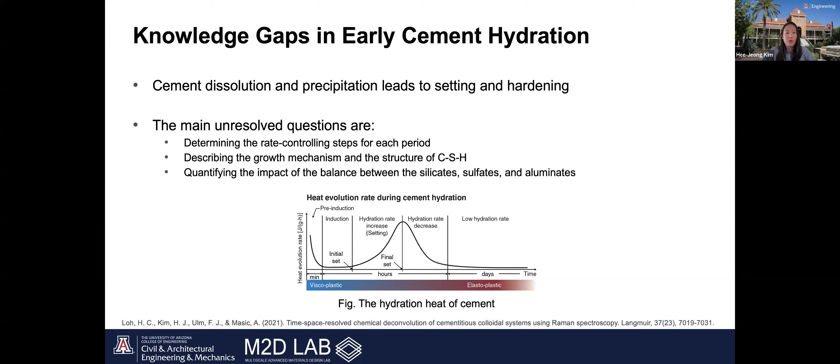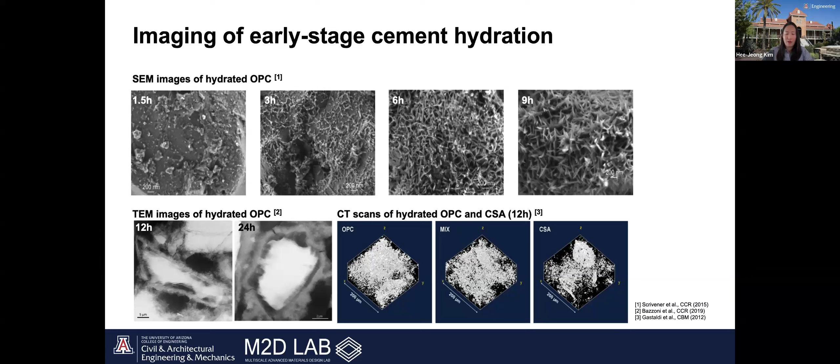So many researchers are trying to understand the early stage of cement hydration using different experimental techniques, such as SEM, TEM, and CT scans, to observe how the material changes over time. These techniques help us see the formation of hydration products and understand how cement hardens in the early cement hydration stages.

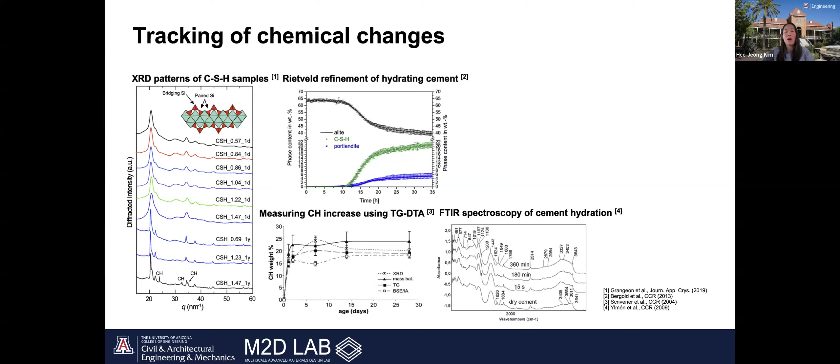To track the chemical changes that happen during early stage cement hydration, researchers also use techniques such as XRD, TG-DTA, and FTIR. These methods help us identify the chemical reactions, monitor phase changes, and understand how hydration products develop over time.

However, most of these analysis methods are invasive, and the samples can be damaged during preparation steps such as crushing, heating, or vacuuming. However, Raman spectroscopy is a non-invasive method that can overcome these disadvantages. It allows us to analyze chemical and structural changes in cement without damaging the sample, making it a powerful tool for studying early stage hydration.

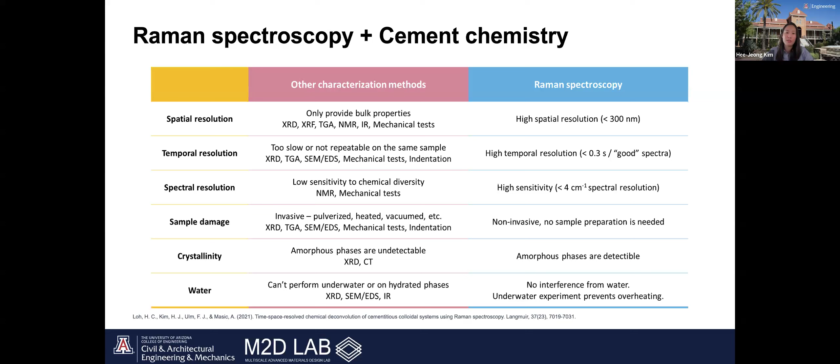Therefore, Raman spectroscopy is ideal for tracking the early stages of cement phase transformation. In this study, I used Raman spectroscopy to observe the cement hydration process, both spatially and temporally. This method allows us to identify the hydration products as they form and evolve. The goal of the study is to understand the dynamics of the early stage cement hydration process and to gain insight into the structure and formation of CSH, which is the main strength giving phase in cement.

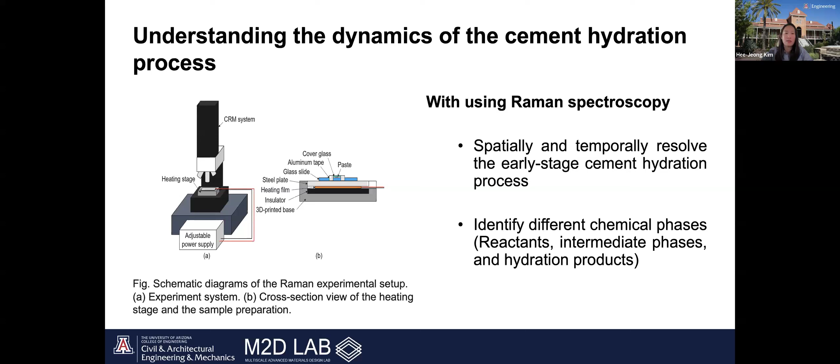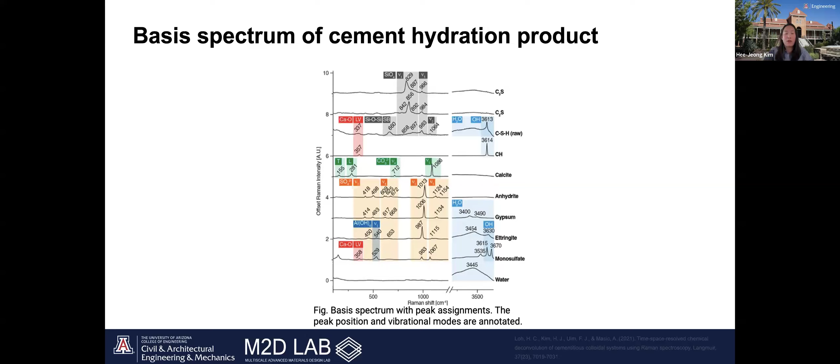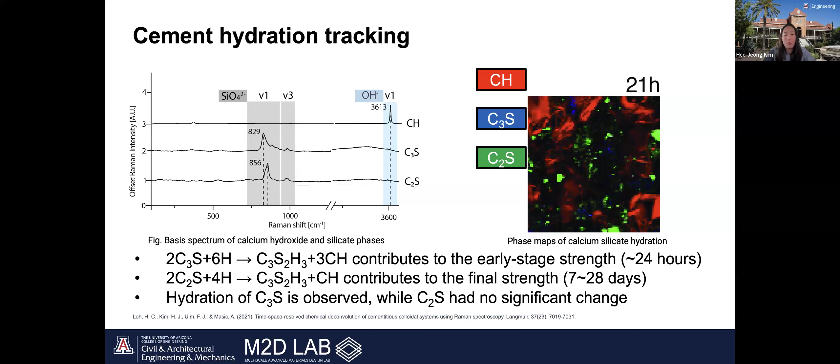So one of the main advantages of Raman spectroscopy is its ability to identify different hydrated phases in cement, such as CSH, gypsum, ettringite, monosulfate, and water. The OH symmetric stretching peaks appear in the range of 3,000 to 3,700 per centimeter, and they can be categorized into four different types: free water, bound water, CaOH, and SiOH. So in this study, we focused on the OH symmetric stretching peaks, particularly the CaOH containing phases, to better understand the hydration reaction and the formation of CSH during the early stages of cement hydration.

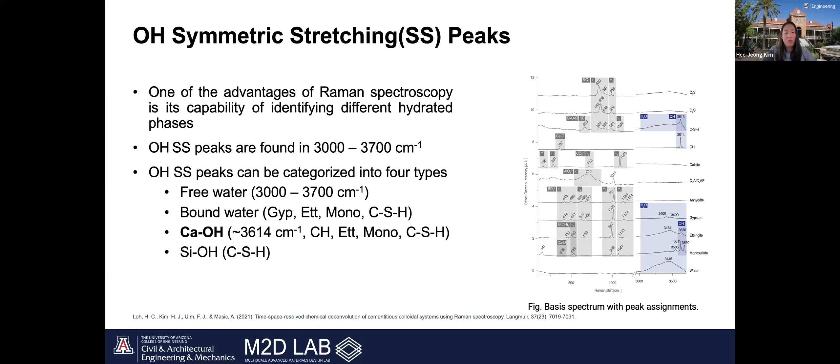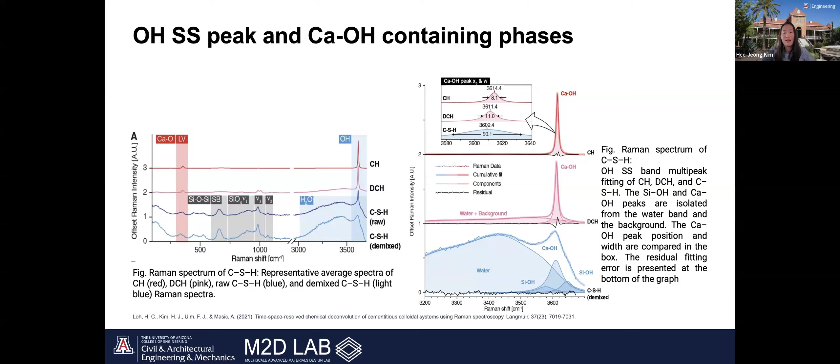OH bonds can be found in many different components of cementitious materials. Here are the OH profiles of calcium hydroxide and disordered calcium hydroxide, and lastly CSH, calcium silicate hydrate, are compared. Both CH and CSH contain OH bonds, but their Raman peak position and peak width are different, reflecting their unique chemical environments. By decomposing the peak profiles, we can identify the local environments of the OH bonds and gain insights into the structural differences between these hydrated phases.

This slide shows an animated plot of the CaOH peak position and width. By tracking these values over time, we can clearly see how the CaOH peak changes during the early hydration process. From this analysis, we discovered a new phase, an amorphous or disordered form of calcium hydroxide, which we call disordered calcium hydroxide, DCH. We found that this disordered CH acts as a precursor to crystalline calcium hydroxide, forming before the setting process begins.

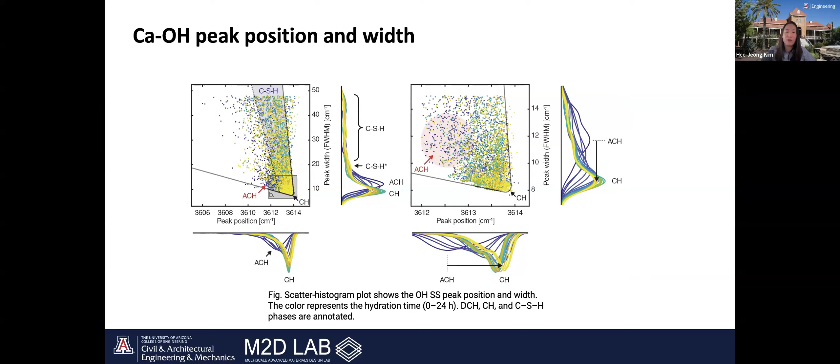This discovery gives us new insight into the early hydration mechanism and helps explain the formation pathway of calcium hydroxide in cement.

From the CSH spectrum, there are three types of OH bonds that can be identified: bound water, CaOH, and SiOH. Based on this observation, we can infer that CSH exhibits a broad bound water peak and an OH peak slightly wider than that of CH, with a right-hand shoulder, suggesting structural complexity. There are numerous structure models for CSH that have been proposed, and our Raman spectrum strongly supports Gartner's model, which describes CSH as a disordered layered structure containing both CaOH and SiOH bonds.

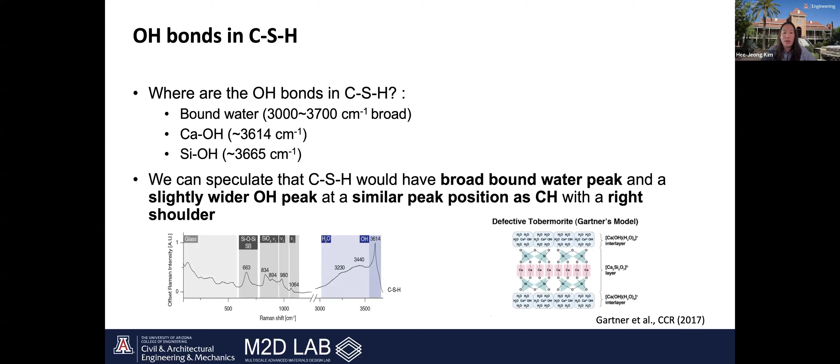Raman spectroscopy can be used not only to study OH phases, but also to differentiate the various sulfate phases in cement. The Raman mapping image shows that a large amount of ettringite is already formed within just 17 hours of hydration. It helps densify the cement matrix structure, contributing to early strength development and stability of the material. This Raman technique can be applied to various types of cement research, as demonstrated in the following studies.

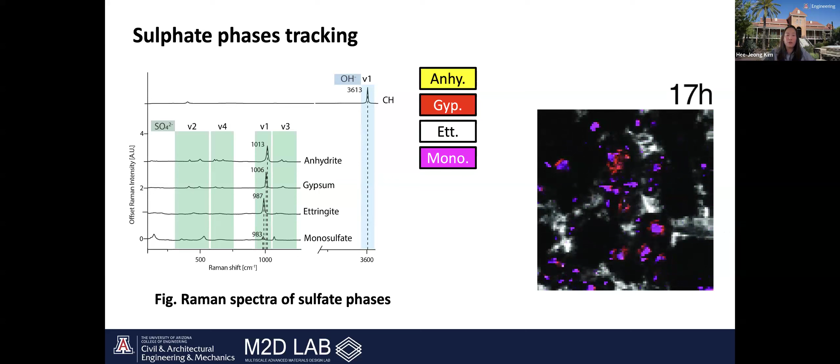The first study is on the activation and reactivity of mine tailings in cementitious cement systems. As you know, a big problem with concrete is the carbon emissions from cement production. Since concrete is the most used material in the world, this has a huge environmental impact. Cement production releases a lot of CO2 because it needs high temperatures and chemical reactions that produce carbon dioxide, making it responsible for about 7 to 8% of global CO2 emissions.

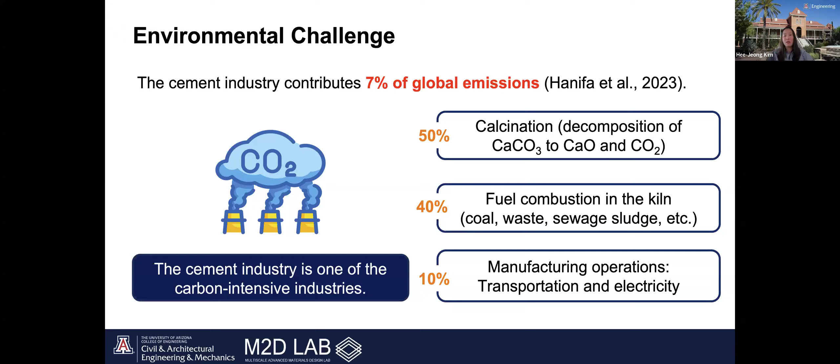To solve this problem, researchers are trying to develop alternative cements and reduce the carbon footprint of concrete. One good way to do this is to use supplementary cementitious materials, or SCMs, as much as possible. These materials can partly replace Portland cement and help lower emissions while still keeping good performance.

In the mining industry, one of the biggest challenges is the accumulation of tailings. Every year, billions of tons of tailings are generated and stored, yet most of them have no practical use. These tailings can cause serious environmental and health problems, such as acid leaching and contamination of soil and water systems. They can also become part of the ecosystem, creating a long-term risk for surrounding communities. In addition, managing and storing this waste is very expensive, requiring large areas of land and continuous monitoring.

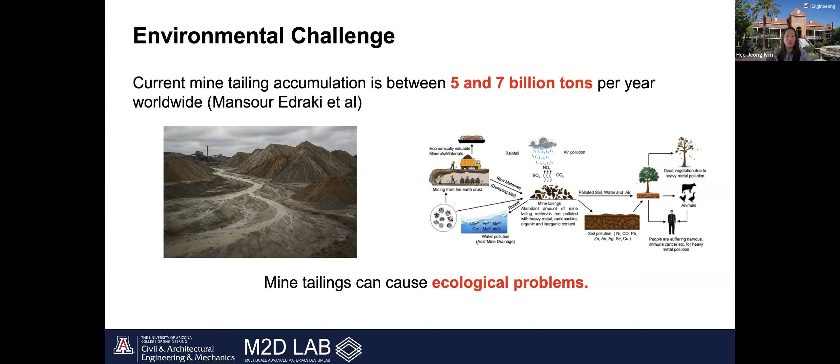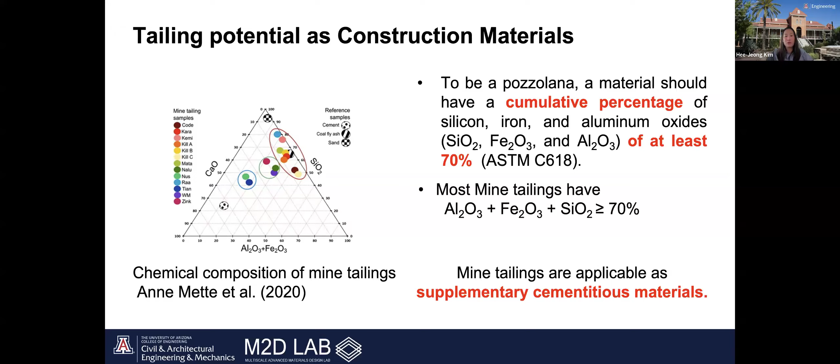If we look at the chemistry of mine tailings, most of them contain a lot of silicon, iron, and aluminum oxides, and some also have calcium oxide. This composition is very important for making cement. According to ASTM C618, pozzolanic material should have at least 70% of silicon, iron, and aluminum oxide combined, and most mine tailings already meet these requirements. This means that tailings have good potential to be used as supplementary cementitious materials, or SCMs.

Based on their potential, mine tailings can be used in many different ways in construction materials. Tailings with a high amount of silicon oxide can be used as a precursor for geopolymers, and they can also serve as supplementary cementitious materials, partially replacing cement materials. Some tailings can be added to the clinker kiln during cement production, and depending on their particle size, they can be used as fine aggregate or coarse aggregate in construction. Tailings offer many possibilities to replace natural resources and reduce environmental impact in the construction industry.

In general, crystalline materials have particles arranged in a regular and stable pattern. Because of this structure, they are usually less reactive, and most minerals in mine tailings are crystalline, which means they do not easily react in cementitious systems.

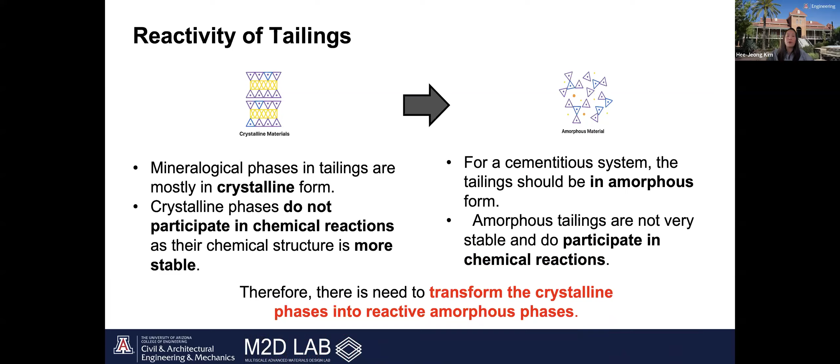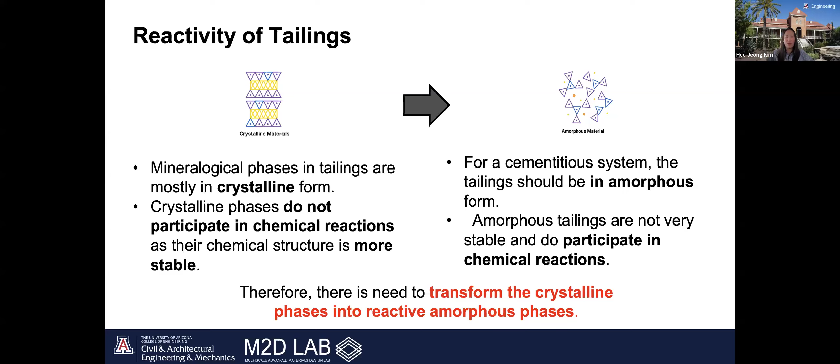However, to make tailings reactive in cementitious systems, they need to be amorphous, where the atoms are not arranged in a regular pattern. Amorphous materials are less stable and can react well in an alkaline environment. So if we want tailings to participate in the cement hydration reaction, we need to convert their crystalline phases into amorphous ones.

Therefore, our first research focuses on the activation and characterization of mine tailings to improve their reactivity. The main idea is simple: we need to add more energy to the material to break the crystal bonds, make it amorphous, or help it rearrange into a more reactive phase.

There are three main activation methods. The first is mechanical activation, which breaks particles, increases surface area, and creates structure defects that make the material more reactive. The second is thermal activation, which uses heat to change stable crystalline phases into amorphous ones. Under the right conditions, it can also form new and highly reactive phases.

The last one is chemical activation, which uses alkaline or acidic solutions to dissolve minerals and create new reactive binding gels. In our research, we mainly focused on using mechanical and thermal activation methods to study how tailings can become more reactive in cementitious systems.

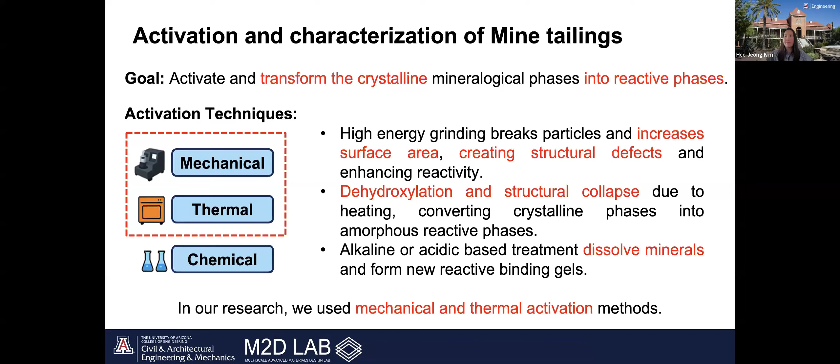In this study, we used gold mine tailings, or GMT. The analysis of GMT shows that it contains several crystalline phases, including quartz and calcite, which are important for cementitious binders. It also includes clay minerals such as orthoclase and muscovite, which are mainly silica and aluminosilicate-based materials.

In addition to these, GMT also contains pyrite and sulfate-bearing phases. These are problematic because pyrite can oxidize and produce acid mine drainage, which is harmful to the environment. And if not treated properly, it can also cause sulfate attack when used in cement-based materials.

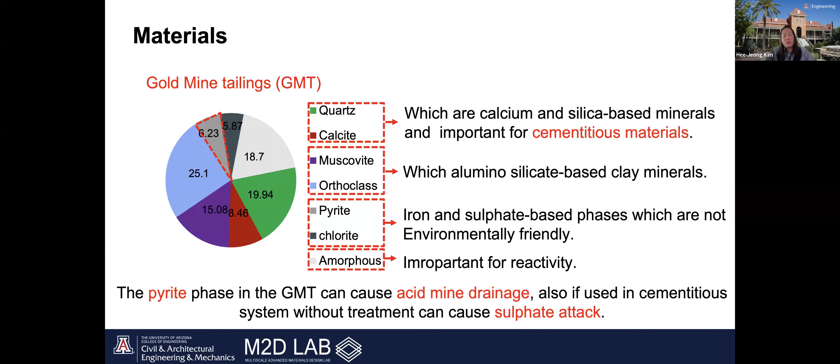After the characterization, about 18.7% of the material is amorphous, which is the reactive portion that can contribute to cement hydration. So we were able to confirm that amorphous phases are about 18.7% in our gold mine tailing samples.

For activation, we used mechanical and thermal methods to increase the energy and break the crystalline bonds, making the tailings more reactive. For mechanical activation, the raw tailings were ground for 16 minutes in a disc mill running at 500 RPM.

For the thermal activation, after grinding, the samples were heated at 800, 1000, and 1200 Celsius degrees. After heating, they were rapidly cooled, or quenched, to prevent the crystals from forming again.

All activated samples were analyzed using XRD and Raman spectroscopy, and we performed quantitative phase analysis with Rietveld refinement, and each refinement showed a goodness of fit below 1.5, which means the result is very reliable.

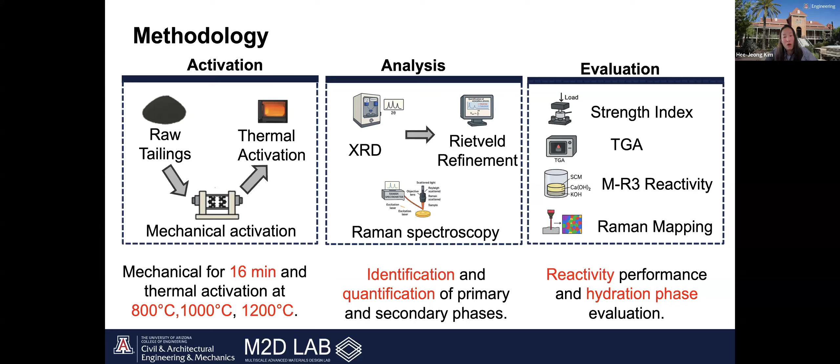Since our goal is to use these tailings in cementitious materials, we tested their reactivity using compressive strength tests, TG-DTA with bound water analysis, and Raman spectroscopy. Finally, Raman mapping was used to identify the reaction products and confirm how reactive the material became.

After the activation, we first looked at the XRD results to see how the phases changed. After mechanical activation, there was no significant change - as you can see, the material stayed mostly crystalline.

However, at 800 Celsius degrees, with thermal activation applied, we saw major changes. Pyrite and chlorite broke down completely, producing new phases like hematite and anhydrite. This shows the start of higher reactivity.

At 1000 Celsius degrees, orthoclase changed into sanidine, meaning the structure was rearranged by heat. At 1200 Celsius degrees, most crystalline peaks disappeared, meaning the material became mostly amorphous and more reactive.

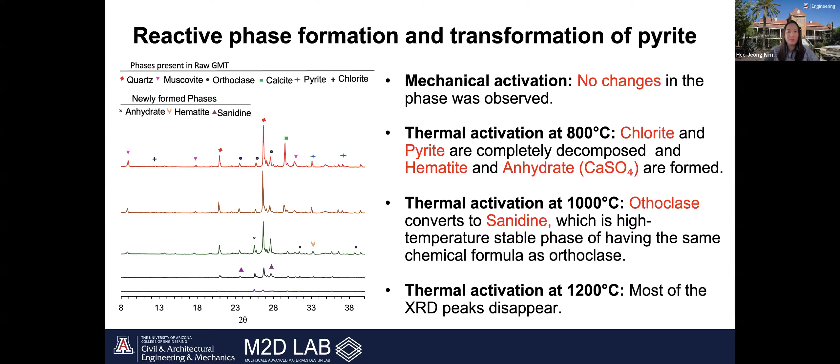We were also able to compare their chemical phases with Raman spectroscopy. As I mentioned before, Raman spectroscopy helps us identify each mineral by its unique vibrational fingerprint, allowing us to see where different phases are located in the sample through Raman mapping.

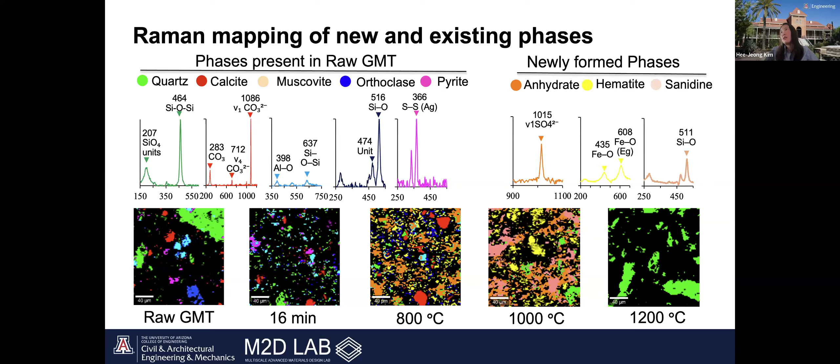In this study, we used Raman spectroscopy to confirm the formation of new phases and to check which original phases remained after the activation. The phase distribution map clearly shows the presence and spatial distribution of these new and existing phases, such as anhydrite, hematite, and sanidine.

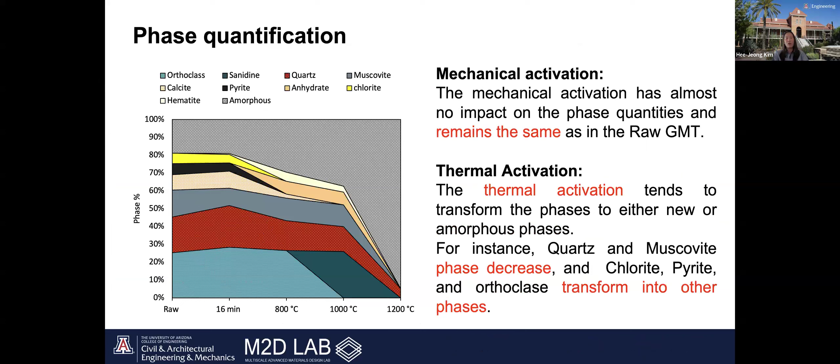So it is important to know how much of each phase is present before and after the activation, because this can be related to their activity. And to measure this, we use the Rietveld refinement for phase quantification.

At 800 Celsius degree, we saw major changes. Pyrite and chlorite completely decomposed and formed hematite and anhydrite. At the same time, calcite dropped from 8.46% to 2.29% due to decarbonation. The amorphous content also increased to about 29%, marking the beginning of higher reactivity.

As the temperature increased further, the amorphous content rose from 19% in the raw material to almost 95% at 1200 Celsius degree. This shows the higher temperature breaks down crystalline phases and creates highly reactive amorphous material.

The easiest way to evaluate reactivity is by looking at the compressive strength with the strength activity index. According to ASTM C618 standards, a material is considered pozzolan if at 20% replacement of OPC, it reaches at least 75% of the strength of ordinary Portland cement. So it means if it reaches 75%, that means the SAI, which is the strength activity index, is 100%.

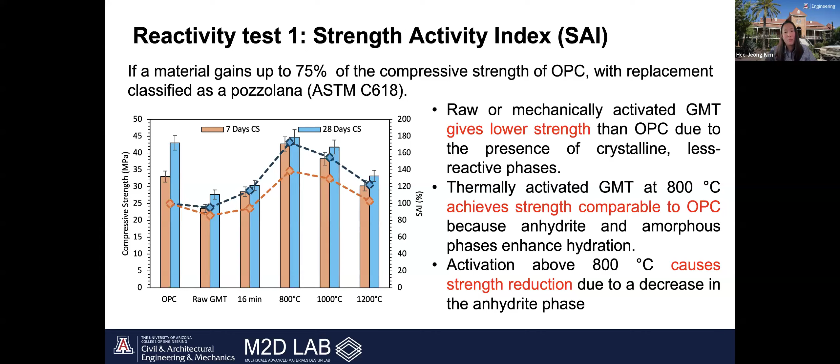At higher temperatures, such as 1000 Celsius degree and 1200 Celsius degree, the strength starts to decrease again. This drop is related to the loss of anhydrite and changes in phase composition. So overall, the thermally activated GMT at 800 Celsius shows the best performance, achieving more than 100% SAI.

Now that we have achieved a higher strength, we wanted to know whether the tailings actually reacted or just acted as a filler. One way to check this is by measuring the chemically bound water, which shows the degree of hydration. The chemically bound water becomes part of the crystal or gel network of the hydration product, like C-S-H or CASH and C-S-H.

When the sample is heated, the OH group in these structures is released, causing weight loss, and that weight loss tells us how much water was chemically bound. We follow Method B of ASTM C1897 standards. The result shows that the 800 Celsius degree activated sample has the highest amount of bound water, which matches well with the compressive strength results.

This confirms that the thermal activation at 800 Celsius not only improved the strength, but also enhanced the reactivity and the hydration of the tailings.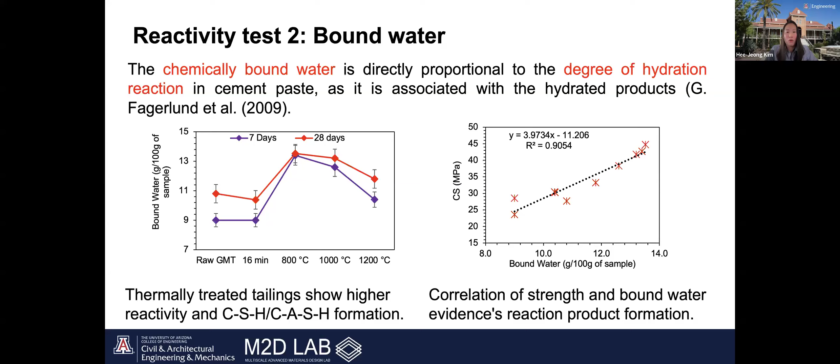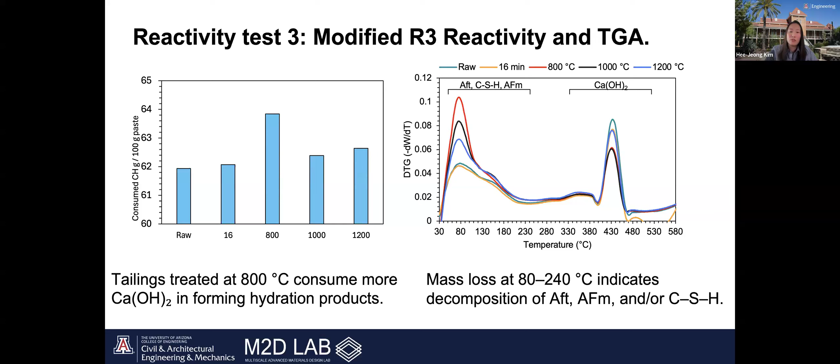To find out which hydration product among ettringite, monosulfate, or C-S-H formed in larger amounts, we used Raman spectroscopy on the R3 reactivity sample activated at 800 Celsius degree, which showed the best performance.

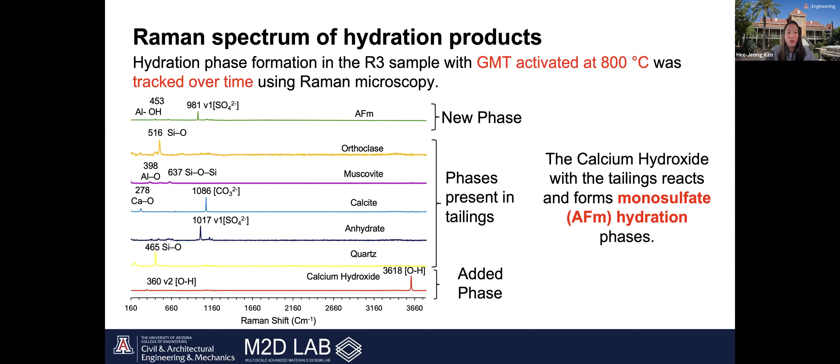After just an hour, the Raman spectra, shown in the figure, revealed the formation of the AFm phase, especially Ca4Al2(OH)12X·H2O. These spectra were used to track and analyze how the hydration product evolved over time, helping us understand the reaction mechanism of the activated tailings.

In the modified R3 test, calcium hydroxide was mixed with the supplementary cementitious materials and cured at 50 Celsius degree for 10 days. The Raman spectra collected over time were used to observe these changes.

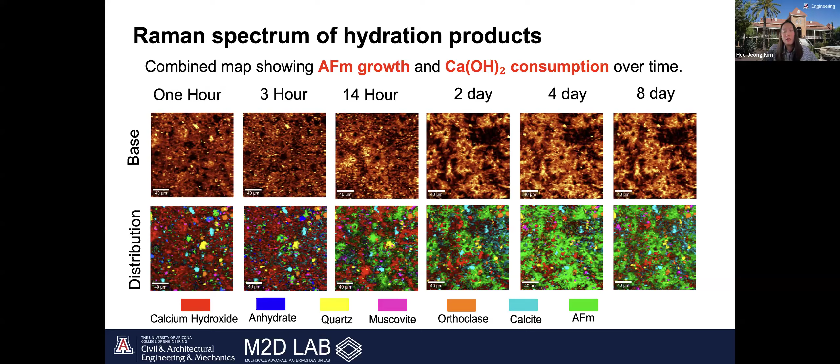On the slide, you can see the raw basis spectrum and the distribution taken after an hour. The raw distribution map shows that the AFm phase keeps growing over time, and this confirms that the main hydration product formed during the reaction is the AFm phase.

The key findings show that optimal thermal activation plays a crucial role in improving the reactivity of mine tailings, and that this happens by increasing the amorphous content and forming reactive anhydrous phases. At the optimum activation temperature, anhydrate and other reactive phases are formed, while pyrite and other unwanted minerals are completely decomposed. These changes lead to better performance of the material in cementitious systems.

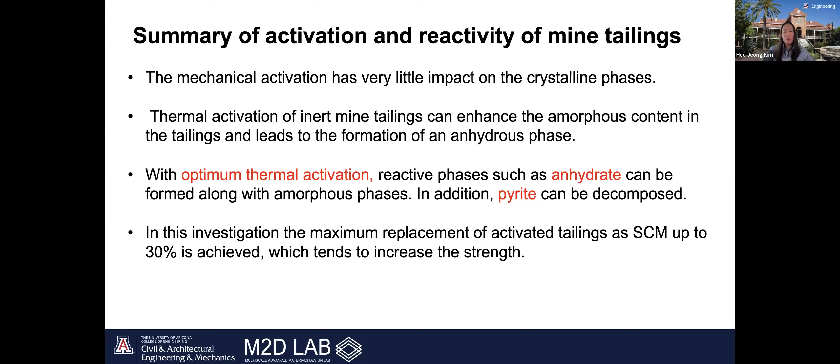We also found that up to 30% of cement can be replaced with activated tailings without losing their strength. In fact, the strength improves, and this approach supports the sustainable use of mining waste in construction materials.

The second study focuses on the machine learning guided reuse of copper mine tailings. Machine learning is important because it allows us to make data-driven decisions to optimize activation conditions and mix design. This helps us deal with one of the biggest challenges in using mine tailings, their compositional variability, and by applying machine learning, we can predict material performance, reduce trial and error experiments, and save both time and resources.

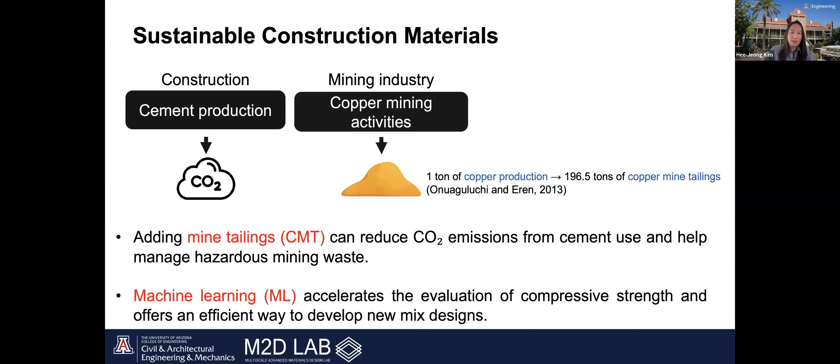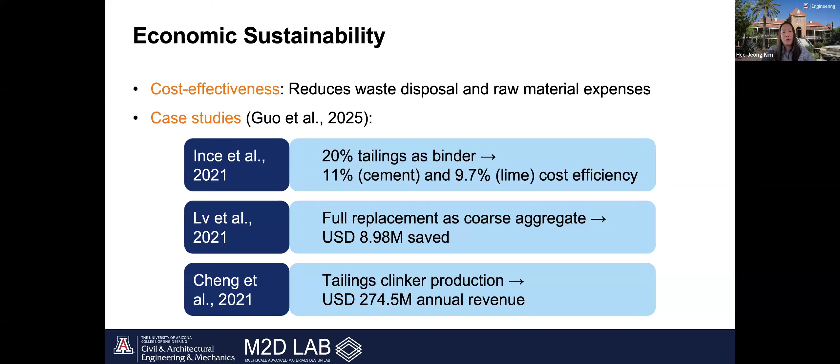Since we both know the construction and mining industry face serious environmental problems, we applied machine learning to efficiently optimize the mix design and target strength, thereby accelerating the development of sustainable construction materials. The economic sustainability of using mine tailings is supported by many case studies that show significant cost savings and new revenue opportunities. In this study, we carried out two separate experiments using copper mine tailings to develop sustainable mixed designs.

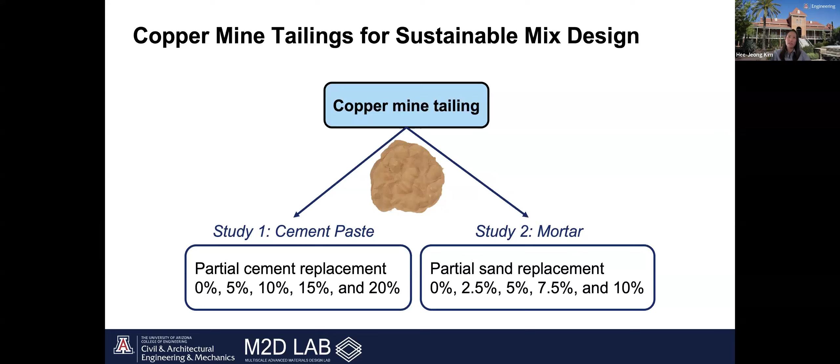In the first experiment, we used the copper mine tailings as a partial cement replacement in cement paste, and in this case cement was replaced from 0% up to 20%. In the second, we used the copper tailings as a partial aggregate replacement in mortar, and here sand was replaced from 0% up to 10%. These two approaches help us understand how tailings affect the performance of different construction materials and how we can optimize their use both for sustainability and strength development.

To train our machine learning model, we needed a dataset that included both mix design information and compressive strength results. Because data on materials containing copper mine tailings is still limited, we used the public database of concrete materials, even though it does not include tailings. That database contains 1,030 data points.

For study one, where copper mine tailings were used as a partial cement replacement, we created our own 31 data points with the experiment. For study two, where tailings replaced sand, we generated 15 data points with the experiment.

We focused more on study one because we wanted to test how machine learning predicts compressive strength with different CMT, like copper mining tailings contents, and water to cement, water to binder ratios, and curing times. Study two included fewer variations.

After combining our experimental data with the public data, the total dataset included 1,061 data points for study 1 and 1,045 data points for study 2.

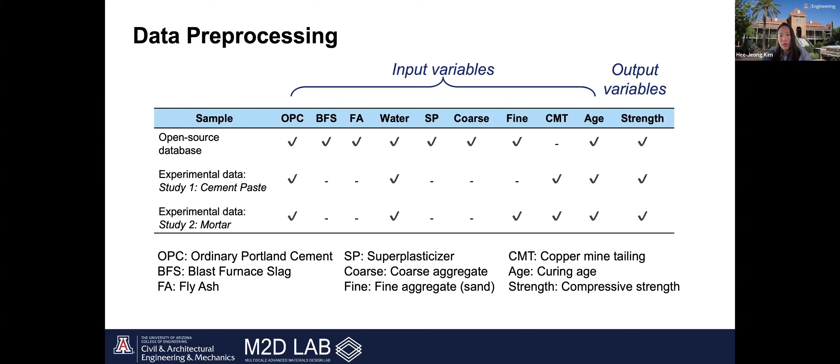Since we combined the open source data with our experimental data, the input parameters now include cement, slag, fly ash, water, plasticizer, coarse aggregate, sand, copper mine tailings, and curing age. When a variable was not available in either dataset, we simply assigned it a value of 0. For example, in study 1, we set zeros in the CMT column for the open source data. In contrast, for our experimental data, we assigned zeros to the BFS, fly ash, superplasticizer, coarse, and fine aggregate columns.

In machine learning, we always need training data to build a model and testing data to check its performance. A common rule is to use 80% of data for training and 20% for testing. In study 1, this rule was applied only during hyperparameter optimization. Hyperparameters are adjustable settings that help us improve the model's accuracy, and optimization helps find the best combination of these values.

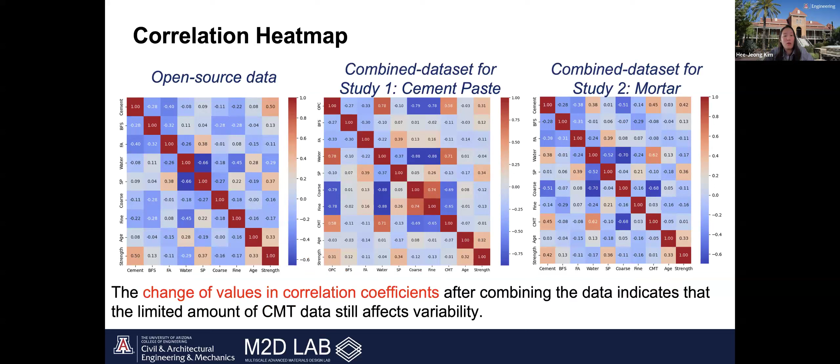In study 2, we applied the 80 to 20 split for the entire prediction process, from training to testing. And to check whether our small experimental data set could be combined with the open source data to build reliable machine learning models, we look at the correlation coefficients between variables, and the combined data set provides a different and more representative data distribution, which is important for modeling materials containing copper mine tailings.

For study 1, we used 3 machine learning models, and among them, the random forest model went through hyperparameter optimization, where we tested 5 key parameters and found the best values using Bayesian optimization. For study 2, we used 10 different machine learning models based on literature to explore which one performed best for this type of data. In this case, we did not optimize the parameters. We used each model with its default setting to compare their baseline performance.

All modeling and analysis were done using Python's machine learning package, scikit-learn.

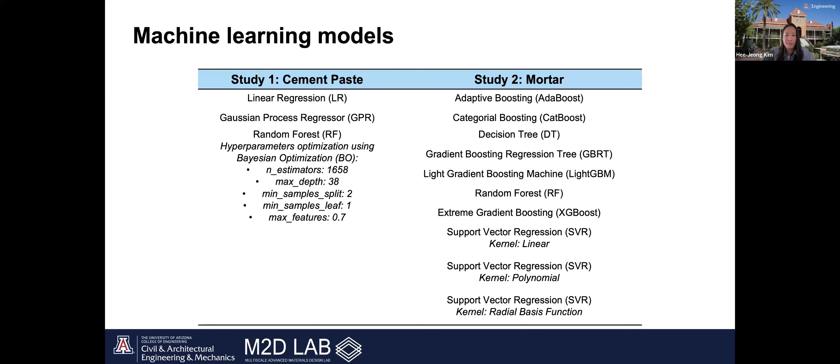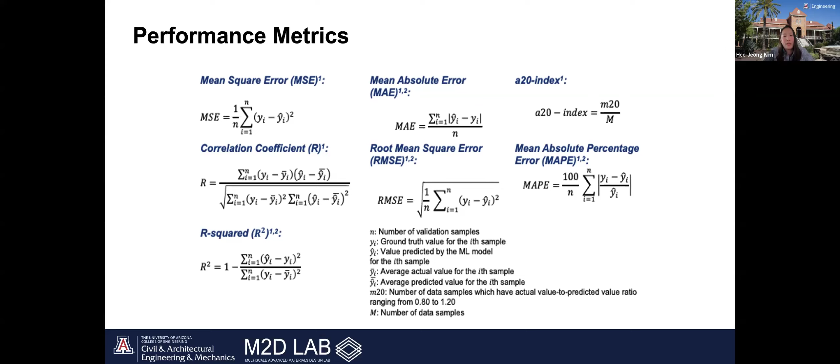To evaluate how well each machine learning model performed, we used several performance metrics, and the numbers are shown on the slide indicating which study used each metric. For example, R2 score was used in both study 1 and study 2 to measure how accurately the model predicts the compressive strength. These metrics help us compare model performance and determine which algorithm works best for predicting the behavior of materials with copper mine tailings.

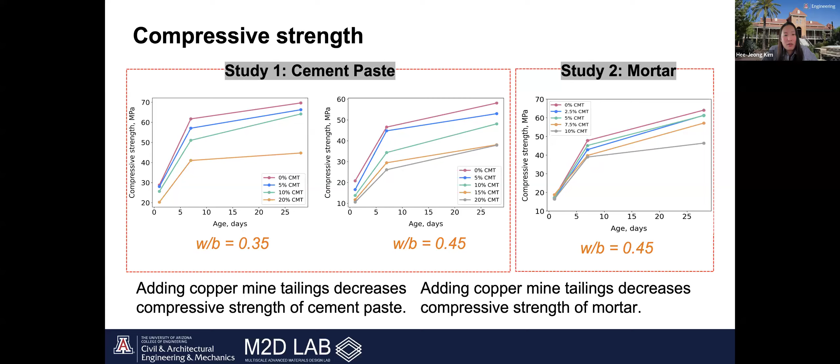However, the cement paste with CMT never reaches a higher compressive strength than the control mix without CMT. Even so, all specimens at 28 days still meet the minimum strength requirement for structural walls, which is 20.68 megapascal, or 3000 psi.

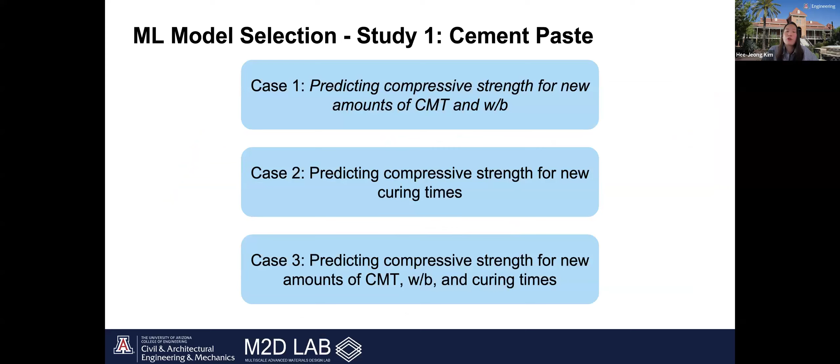However, when we introduced new curing ages, or combinations of new CMT amounts, water to binder ratios, and curing ages, the models were less accurate. They could not predict compressive strength as reliably in those cases. Among all the models, the random forest model with Bayesian hyperparameter optimization performed the best overall in case number one.

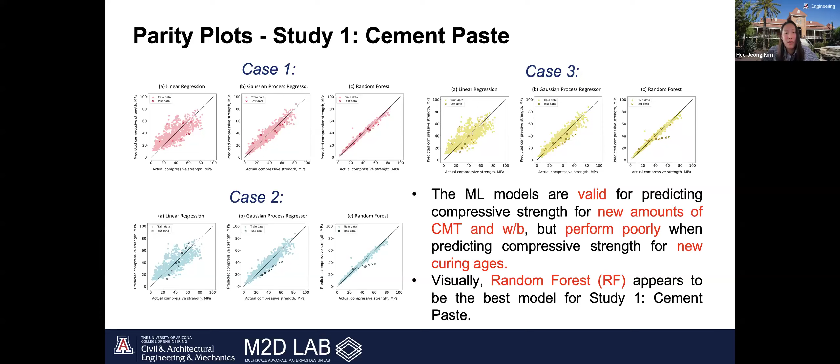To validate the parity plots, we used several performance metrics to see which machine learning model performed best. For these metrics, lower values are better for MSE, RMSE, MAE, and MAPE, while higher values are better for R, R squared, and the A20 index.

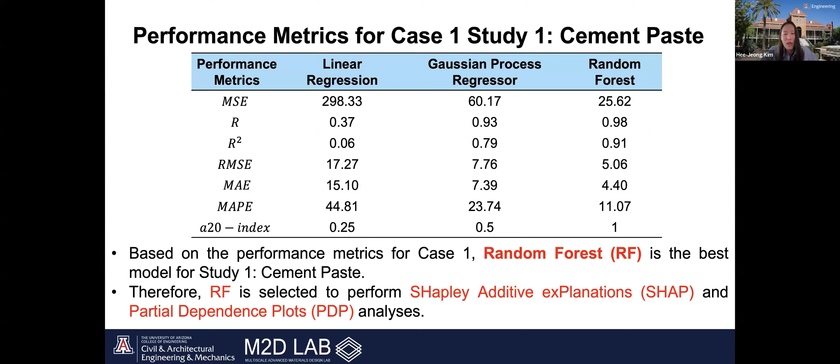Based on this research, the random forest model was confirmed as the best performing model, and we then used the random forest model for further analysis, including Shapley additive explanation and partial dependence plots, which is PDP, to better understand how each variable affects the compressive strength.

The random forest model trained using our case one data, which predicts the compressive strength of cement paste with a new amount of copper mine tailings and water binder ratio, was used to generate a predictive compressive strength curve over curing age. In the graph, the points represent the experimental data, which is the actual values, and the line represents the model's predictions.

The results confirm that our machine learning model can accurately predict compressive strength for new CMT contents and water to binder ratios, but it doesn't perform as well when predicting new curing ages. We also expected the compressive strength to continue increasing after 28 days, but the predicted curve shows a plateau, meaning the model assumes the strength stays almost constant after 28 days.

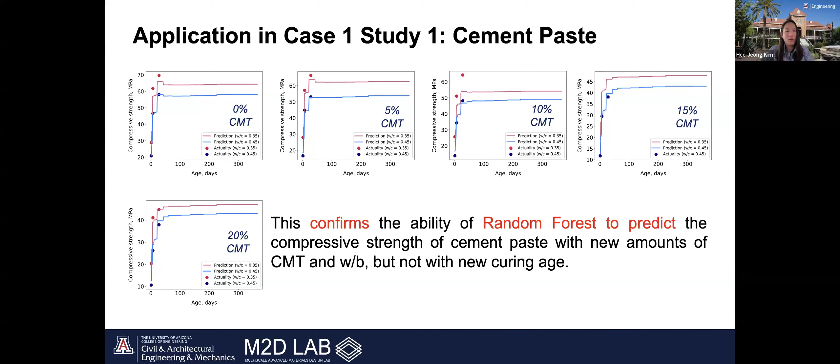From the SHAP results, we identified which factors have the greatest and least influence on compressive strength. For both study one and study two, the results show that curing age is the most influential factor, while CMT has the least influence on strength. In study 2, the effect of copper mine tailings is even smaller than in study 1, indicating that their influence on the overall strength of the mortar is limited compared to other mix design parameters.

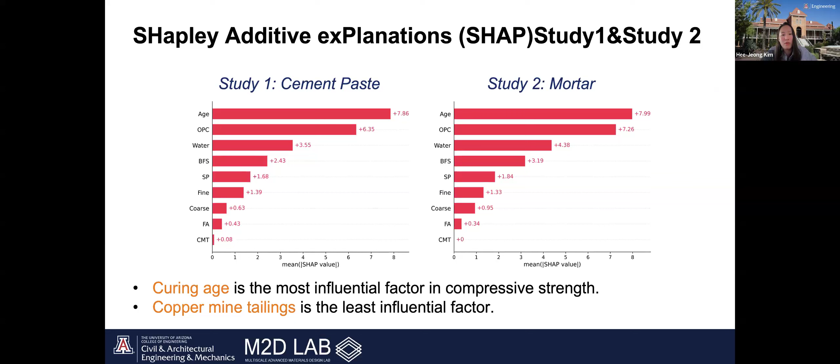To see how copper mine tailings affect compressive strength, we used PDPs. In study 1, adding up to 250 kilogram per cubic meter of copper mine tailings caused only a small decrease in compressive strength. In study 2, adding up to 80 kilogram per cubic meter of copper mine tailings reduced compressive strength by just 0.12 megapascal. These results show that we can incorporate a significant amount of copper waste to produce sustainable construction materials with a minimal loss in strength.

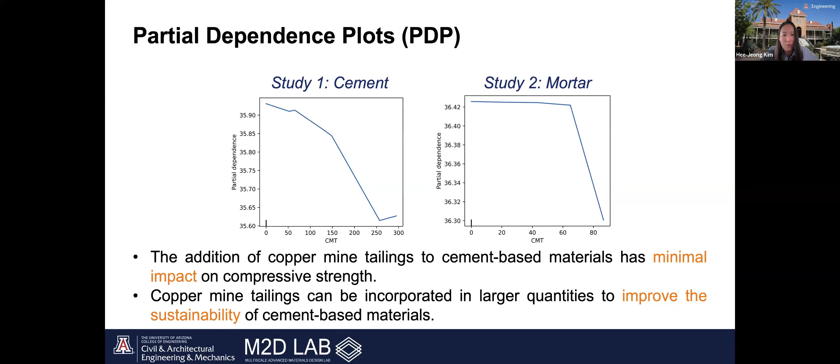To compensate for the slight reduction in compressive strength caused by tailings, blast furnace slag can be added. Our PDP results for the BFS, available in our paper, confirm this positive effect.

In study 1, where we predicted the compressive strength of the cement paste, the random forest model with Bayesian hyperparameter optimization performed the best. However, this model was most effective only for predicting new replacement levels of copper mine tailings and water-to-binder ratios, not for new curing ages.

In study number 2, which focused on mortar, CatBoost was the best machine learning model. Across both studies, curing age was the most influential factor, while copper mine tailings had the least influence on compressive strength. This means that a larger amount of copper mine tailings can be safely incorporated to create more sustainable construction materials without significantly reducing the strength.

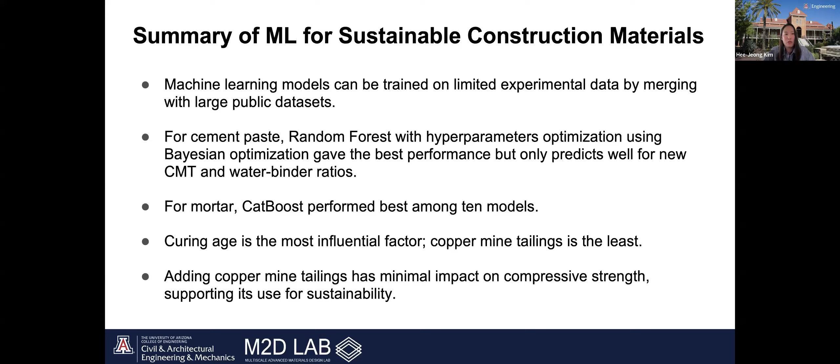Lastly, I will talk about regolith materials, an emerging field that strongly emphasizes sustainability and utilizes in-situ material for space construction. As I will discuss in the next slide, building in space is extremely challenging due to the long lead times, harsh environmental conditions, and limited availability of resources.

Any successful space construction project must be able to extract and process local materials such as regolith and find ways to remotely utilize those resources for building. This concept is known as in-situ resource utilization, or ISRU, and it plays a key role in enabling sustainable infrastructure beyond Earth.

The lunar surface is covered with fine regolith powder created over time by constant impact from meteorites or exposure to radiation. This radiation comes from both the solar wind and cosmic sources outside our solar system. In addition to radiation and impacts, the moon also experiences extreme temperature swings between day and night. These large changes can put significant stress on any materials used for construction on the surface.

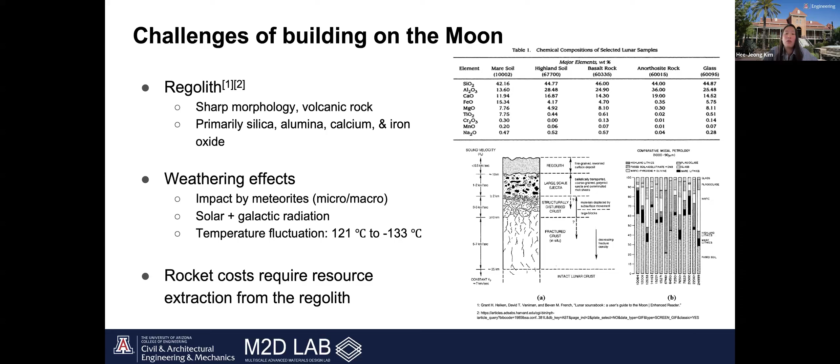In our lab, we focus on investigating the material properties of three classes of potential lunar construction materials. In the following sessions, I will discuss three studies we conducted to characterize and optimize the mix designs of these materials. The first one is fiber reinforced sulfur cements, the second one is regolith based geopolymers, and the third is baked sintered regolith powder. Each of these materials offers unique advantages and challenges for building sustainable structures on the moon.

The first study examined how particle size affects the compressive strength of the regolith simulant-based one-part geopolymer. As background, one-part geopolymer is formed by reacting a precursor powder, rich in amorphous silica and alumina, with a highly alkaline solution. The alkaline activator breaks the bond between silica and alumina tetrahedra, dissolving the powder into a paste. This paste can be cast or extruded to form a solid part.

As water evaporates, the silica and alumina organize into the amorphous gel known as NASH, or sodium aluminosilicate hydrate, and the material reaches its final strength once this gel is fully dehydrated and solidified. For lunar applications, the precursor powder would come from lunar regolith, while the sodium activator would either be brought from Earth or extracted directly from the regolith itself.

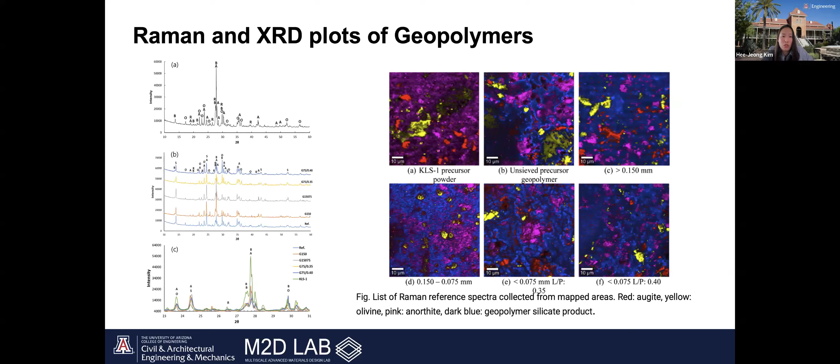The results showed that the crystalline components of the material remained mostly unchanged after the reaction. However, a new amorphous silica phase is formed when the regolith powder was exposed to the alkaline activation solution. This amorphous gel is important because it plays a key role in binding the particles together and forming the N-A-S-H gel, which directly contributes to the strength and durability of the geopolymer.

The second study focuses on developing a regolith-based sulfur cement. Sulfur cements are a promising alternative to regolith geopolymers because they don't require water, and they only need heat to form and solidify, which makes them well suited for the lunar environment.

The goal of the project is to perform mechanical testing needed to build a finite element model of a fiber-reinforced sulfur cement, and the future goal is to develop a mix design that can be used for large scale 3D printing applications on the moon.

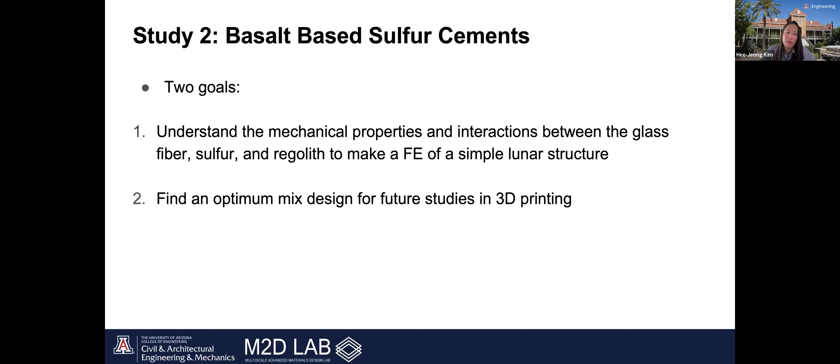In this study, we used basalt as a regolith simulant since it provides a cost effective alternative to high fidelity simulants like KLS1. Here is some background on the sulfur cements.

The basic idea is elemental sulfur is mixed with the dry regolith and then heated to about 120 Celsius degrees. When the sulfur melts, the mixture becomes a thick, viscous paste that can be compacted or extruded into shape. As the material cools, the sulfur solidifies and transforms from the liquid phase into the monoclinic beta phase, as shown on the right figure.

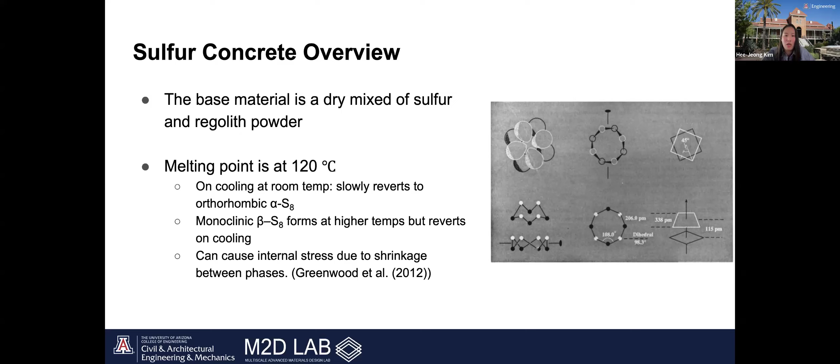This process requires only low heat and no water, which makes it ideal for lunar construction. Another big advantage is that any failed or damaged materials can be remelted and recycled, allowing for efficient reuse after demolition or repairs.

From the Raman mapping results, we found that the sulfur had very limited chemical interaction with the basalt powder, and there was no evidence of sulfide formation along the particle boundaries, which means the sulfur mainly acted as a binder rather than chemically reacting with the base materials.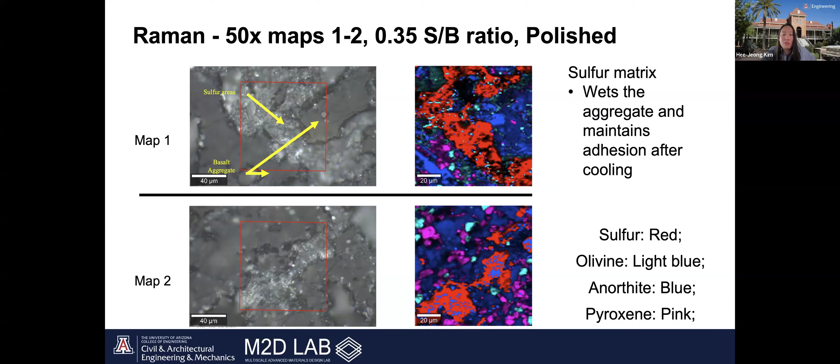This result suggested the bonding in sulfur cement is largely physical, and the overall performance depends more on mix design and compaction than on chemical reaction. Lastly, our lab has been exploring the use of regolith sintering and melting to create small scale parts.

These materials are especially interesting because they use the regolith powder directly without any additional processing or binders. In our experiment, regolith simulant was heated to 1200 Celsius degrees and 1600 Celsius degrees to sinter and melt the material, and the resulting samples were then characterized using Raman spectroscopy and SEM microscopy to study their microstructure and phase composition.

The long-term goal of this study is to apply laser powder bed fusion to additively manufacture complex parts directly from the lunar regolith powder, enabling on-site fabrication for future space applications.

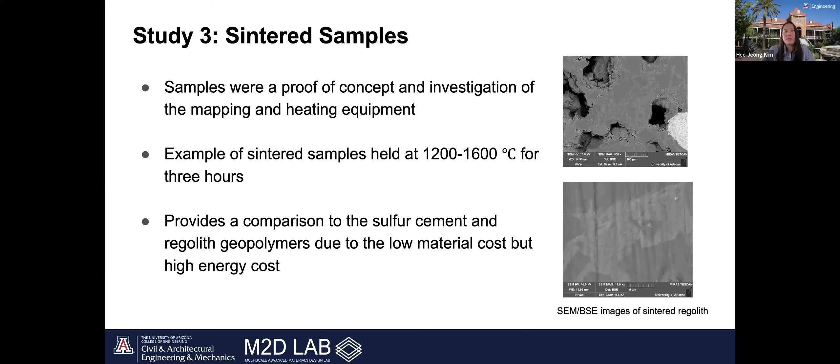The melted sample shows clear signs of recrystallization and a loss of the original powder morphology, meaning the individual particles had fully fused together into a dense glassy structure.

In contrast, the sintered sample retains its distinct particle shapes, with the particles bonded together at their contact points while still maintaining a visible granular structure. These results show how processing temperature strongly influences the final microstructure, with sintering preserving particle features, and melting producing a more homogeneous and fused material.